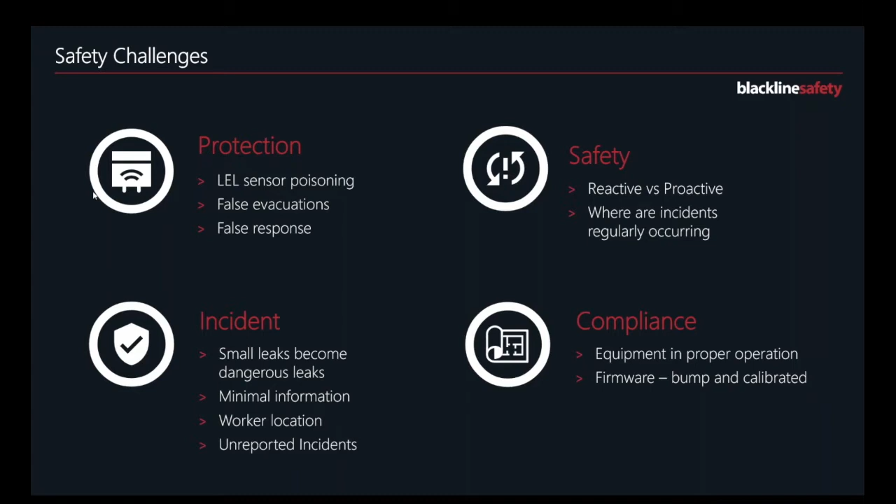With the Blackline safety solution, we can see where low-level gas events are occurring and when. We can collect where a cluster of incidents are happening and look for trends. Is there a common area that always causes the gas detector to false alarm? At Blackline Safety, we gather all this information together and turn it into actionable data that can drive down incidents and help you create a safer work environment. Let me show you how.

So some common challenges with combustible LEL sensors today is that they can become poisoned and won't respond to an explosive situation. Testing the sensor with gas, or bump testing, gives some confidence that the sensor is working, but if a sensor was poisoned during the day between these bump tests, the device won't work, which can lead to serious consequences. Infrared sensor technology cannot be poisoned, but does not see all combustible gases like hydrogen and acetylene.

So there are various hydrocarbons that can be present at many industrial sites at the same time, especially at a site like a refinery where you can see gasoline, jet fuel, and other hydrocarbons all at that same facility. So typically an LEL sensor is calibrated to methane, and then correction factors are used to estimate the concentration of the combustible gas that's being measured. For example, let's say propane.

So in that example, as the monitor is being moved around the facility, if it now encounters xylene at a combustible level, it's going to try to react, but it's being tuned to propane. That's a correction factor in it. So what often happens is that there is an alarm, people evacuate from the area, and then if you look at it later, you'll find out that actually that wasn't in need of an evacuation. It wasn't at a dangerous enough alarm level.

But because that detector is tuned to a specific gas, because the assumption is that's what it's going to encounter, that's the best it can do. That's just the way that catalytic bead and infrared technology is today. So now looking at a new technology, the molecular property spectrometer, or MPS sensor, it can't be poisoned. It measures a wide range of combustible gases all at the same time.

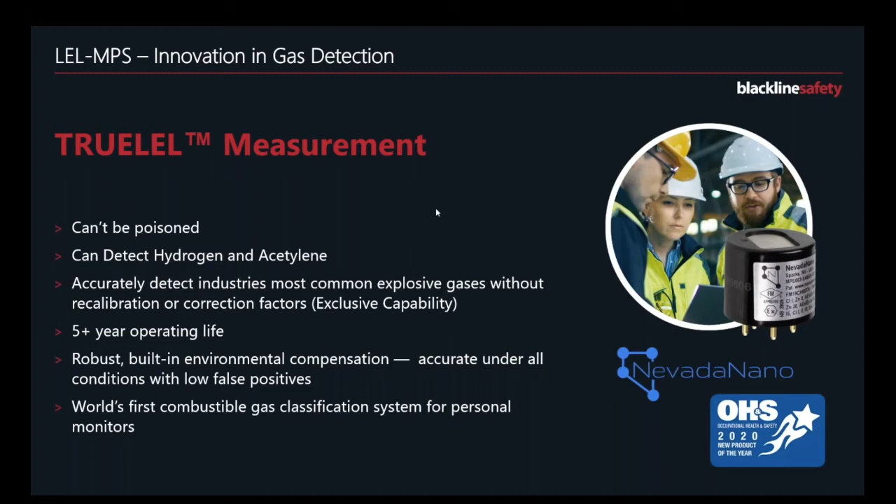So once that measurement has occurred, usually, if it's an alarm state, it's leading to an evacuation. So, what's Blackline doing about evacuations? Well, when they take place, they need to occur obviously as quickly and as safely as possible. The command center needs to direct large groups of workers away from an incident.

So with the G7 and the G7 EXO, our area monitor, you'll get messages that come right up on the screen of the devices that can help you manage that large evacuation. So you're basically telling a whole group where to evacuate to, very seamlessly and efficiently. In real time, you can see how the evacuation is going. On a map, you can see how people are moving through the facility.

And then if you find an area, maybe you have one individual that has stopped moving for some reason, you can reach out to them to try to understand. But if they need some help, maybe you can send an evacuation team to them. So make sure that everybody is evacuated properly.

Now, once the evacuation is complete, let's say that this was a training exercise, you can see how efficient the evacuation was. What were the mustering routes that were used? How long did it take for the evacuation to occur? So the intent is that you can do a lessons learned on that evacuation, and say, how do I become more efficient? How do we evacuate better?

Maybe I find that a certain group, I want them going to a different area because there's a bottleneck in that evacuation. So the goal is to learn from that training experience and understand how do you more efficiently evacuate.

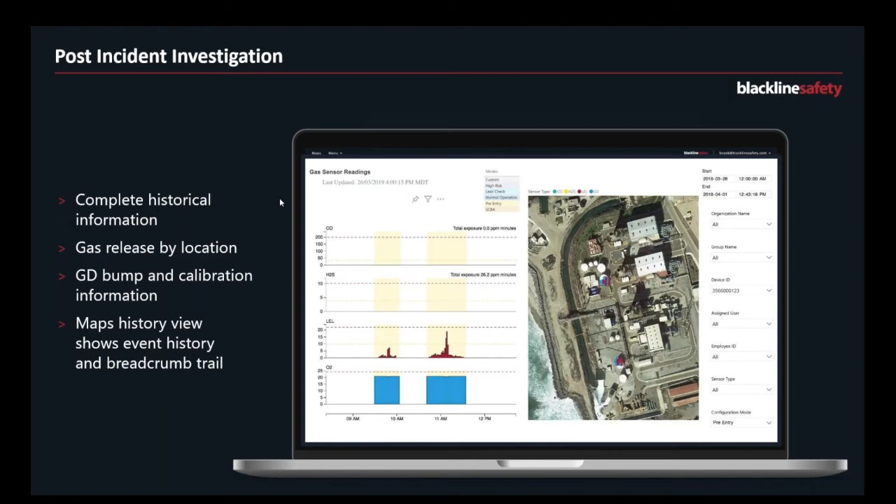As we look at the future, the goal is to be predictive. So what we're really trying to do with this data is to be able to help you identify areas where an incident is going to occur. So it's not just a post-investigation or an evacuation, it's trying to get to a point where you're seeing where things are going to occur and try to stop them before it happens.

So Blackline is pulling in a myriad of data: worker location, small gas releases that aren't alarm events, what's the level of the gas detector, its operation, has it been bumped, has it been calibrated, any two-way communications that have gone on. Maybe there's no motion events or even fall detection events. So this grouping of safety data is being pulled in real time into our software.

And then we start looking at that to look for trends, or we're looking for situations where there's grouping of events. So you might have a common event where maybe there was a false alarm in a certain area, and it keeps occurring over time. So you don't know exactly maybe what's going on in the area, but you can at least tell a worker, if possible, avoid that area, because maybe you've proven that it is a false alarm.

But maybe also in a certain area, at a certain time of the year, you see that there's a lot of falls in that area, and that's because of ice. So maybe a certain area ices, and then when it hits a certain point during the year, you can put down an anti-icing agent. So the goal is to pull in a myriad of information to start looking at these trends and groupings.

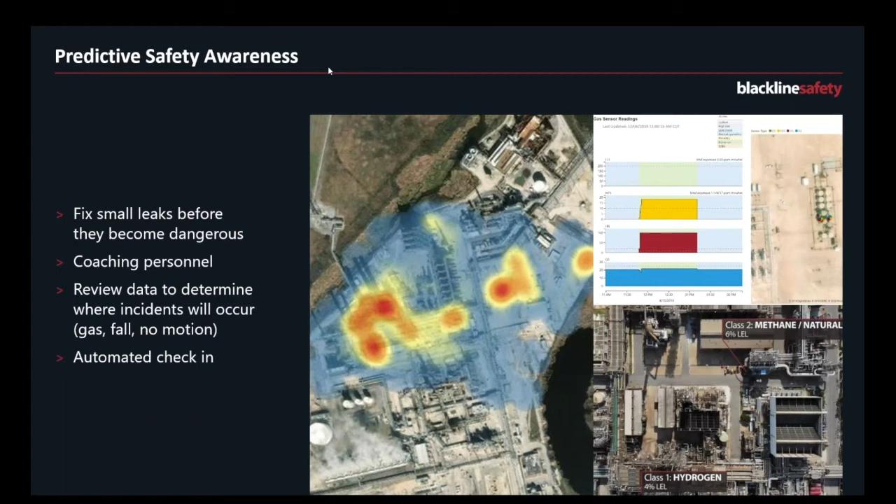Now, when we look at it from a compliance standpoint, one of the key things is: is your equipment working and is it in proper operation, right? So we are all aware of bumping the system, making sure you're hitting it with gas and that it's in good proper order, but also calibrating the devices to make sure they're working.

Even though processes and procedures tell employees when to do it and how often, it still doesn't always get done. And that information is not always at your fingertips. With the Blackline solution, it is. All that data is immediately reported in real time up to the software package Blackline Live. So you can pull a report and look at the data to see who is not bumping and calibrating the device. So you have that real world visibility.

Just like if there's an incident, you know in real time. You don't have to wait until the detector has been docked. Or in some cases, we all know that some workers just choose not to. They find it's a challenge, or they just feel it's not that important. So the safety group often does not have visibility into what's going on. With the Blackline equipment, they do.

All that data, through the cloud, through cellular and satellite connectivity, is immediately reported up. So you always have visibility, by the second, of what's going on at your facility, and then you can mitigate it before it becomes an issue.

One of the other challenges the market sees today is when a firmware release is sent out. Imagine a scenario, and these happen every year at a facility: you can have 1,000 gas detectors where a firmware update came out. That can be pretty challenging. You basically tell the group, I want everybody to come in and dock their detector. It typically takes 3 to 4 minutes per detector to get the firmware upgrade. So it's kind of a hassle.

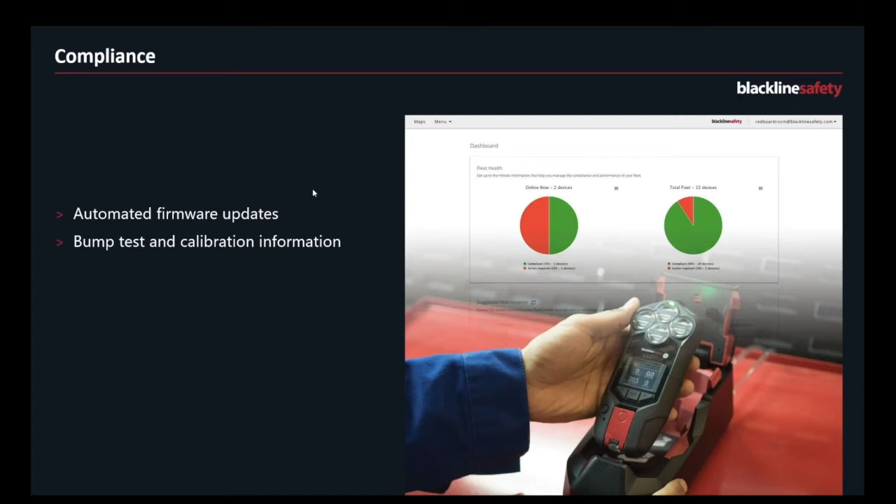So when we look at the connected worksite that Eve was talking about earlier, from a safety perspective, all of your data at the worksite is brought in. You have area monitors bringing in the data. And as we move into the connected worker, all that data is brought in, right? We've talked about your gas detection readings, your fall detection, is the person falling down, is it no motion? So there's a myriad of information being pulled in, as well as all the gas data.

One of the things Blackline does is pull in heat maps. I'll explain that a little bit. At a site, we're not just pulling in alarm data, but also those low-level leaks, because we know a low-level leak can become a dangerous leak. So the point of the data is to gather that and start to indicate that there are certain areas where a low-level leak needs to be fixed so that it doesn't become that dangerous leak and affect the workers or the plant.

All that data is monitored through our monitoring center, or if you choose to self-monitor, and then it's all brought into the cloud. So we can start looking at how to gain real-time visibility in your operations, which is a challenge today from a safety perspective, be predictive, and really shape safe behavior. So I'd like to turn it over to Eve, and we can continue on from here.

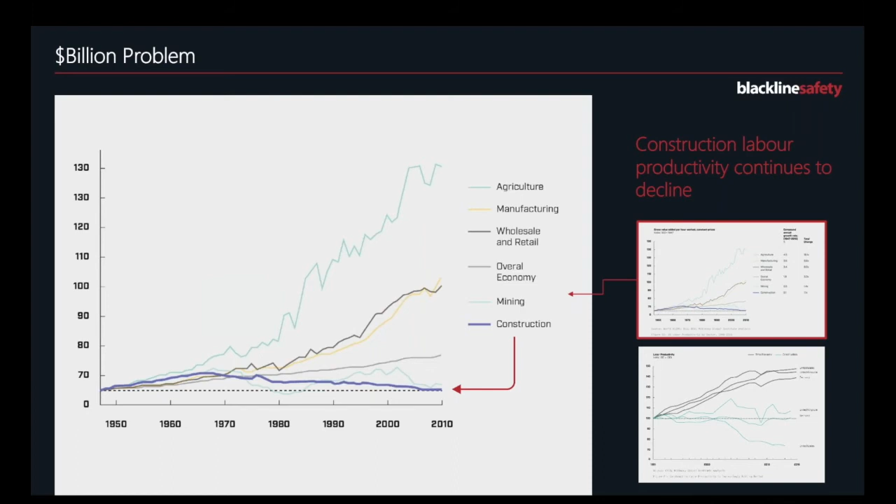But to help clients with this billion-dollar problem of how they're changing projects to be digital projects, I'm going to show you a few different real reports that we've pulled from Worksites. I'm going to fire through this fairly quick.

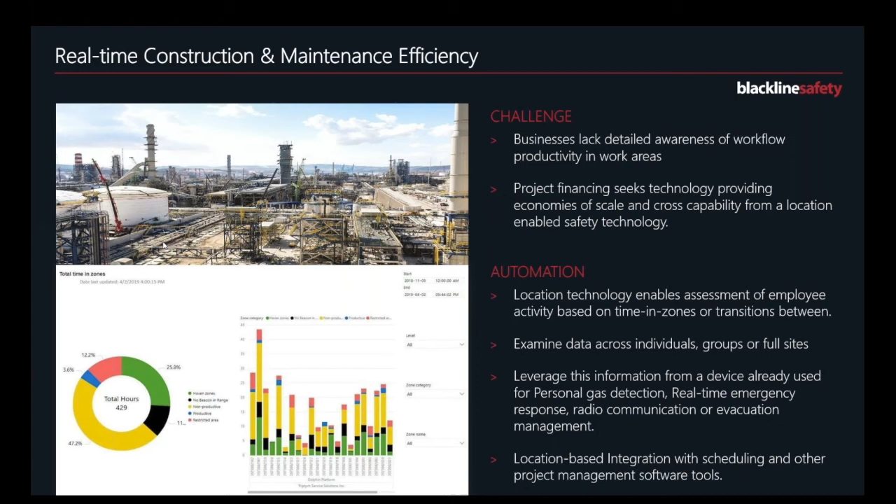And we use that location awareness to help you understand where people are spending time. And again, this is just one great way that we're helping companies save money in getting that balance of safety and productivity. So you start looking at that in detail, and you can generate patterns of movement or look at this movement and efficiency. So we can start quantifying, based on a client's communicated key performance indicators of what efficiency means to them, how your project is doing from an efficiency standpoint.

So on screen here is really a view of what someone deems as productive versus non-productive time or time spent in an area. And then we're quantifying that to show them how their project is doing. And in this graph here, you can see there's a slight uptrend to the productivity in average over time. So that's generally what you want to see within a project, is that uptrend in productivity over time as people learn throughout the length of the project.

But what we're providing to organizations is real data so that they can prove and understand that that's actually happening. And if it's not, we can help them drill down to specifically where they might be losing some efficiencies.

And where those exclamation marks are, you can see a dip in the ratio, and we were actually able to overlay when incidents happened, with a correlation to less time spent by supervisors in that area with the employees. Now, to get a better understanding of why that was, we'd have to spend some more time with the client and look at other data sets where we might be able to find correlations.

But this was a really instrumental effort with us and a client to take that workflow productivity from an efficiency standpoint and apply it to a safety aspect. And again, we're using the same technology stack. We're just looking at different KPIs and perspectives to help people with different insights that they were looking to understand.

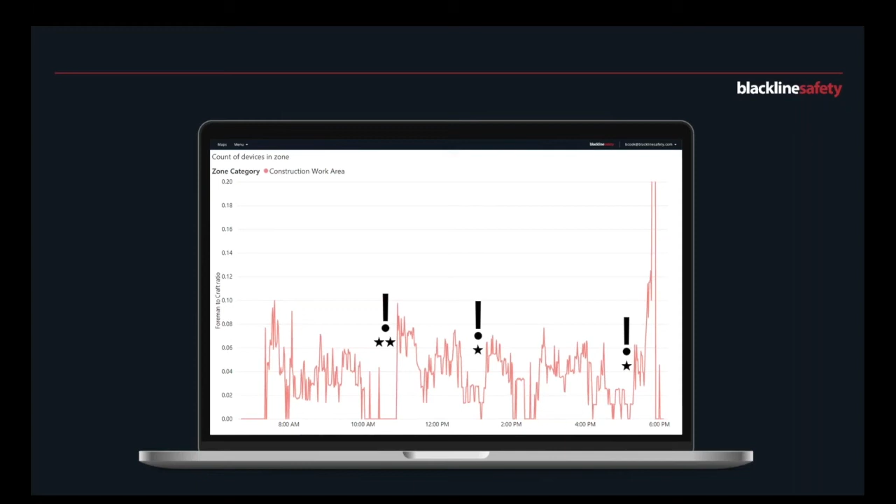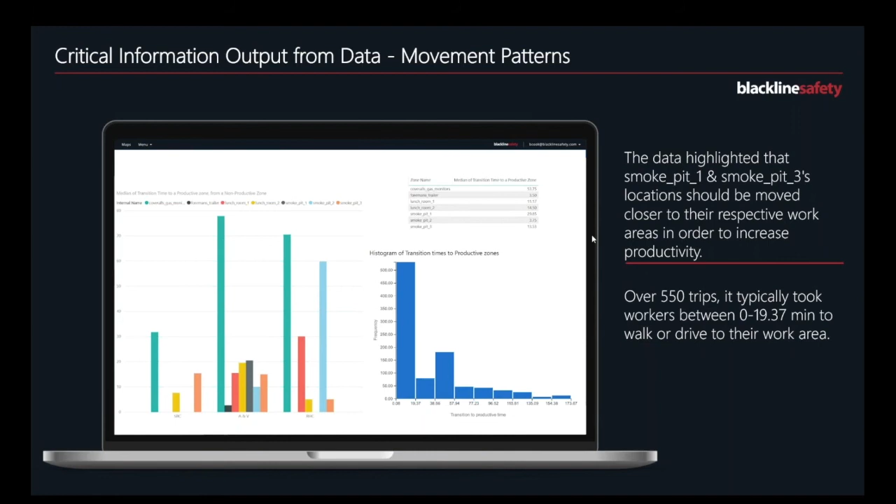But really the main client wanted to understand: if this contractor gives us a bill for 100 hours of work, what was their time spent on site? And if it's within 95% of the bill, then that was one of the levers that they would flick to yes to say it was okay to pay an invoice. So we integrated our system with their billing system or their scheduling system to help them understand and better account for time spent on the project.

So all of those reports really just help you understand at a higher level the digital worksite solution and all the different data points and data focuses that you might want to look at to help you get more value out of your safety and your productivity requirements.

So we really are looking to help everyone understand worksite behavior to drive continuous improvements in your safety and your productivity, whether that's head counts, scheduled versus actual time in work areas, site layout optimization, that supervisor to employee safety aspect of knowing that people need to spend time in areas to help and mentor employees on the right way to do work and safe ways to do work, finding reasons for idling, whether it's permits, weather, equipment, and those other added value points like push to talk radio on a project.